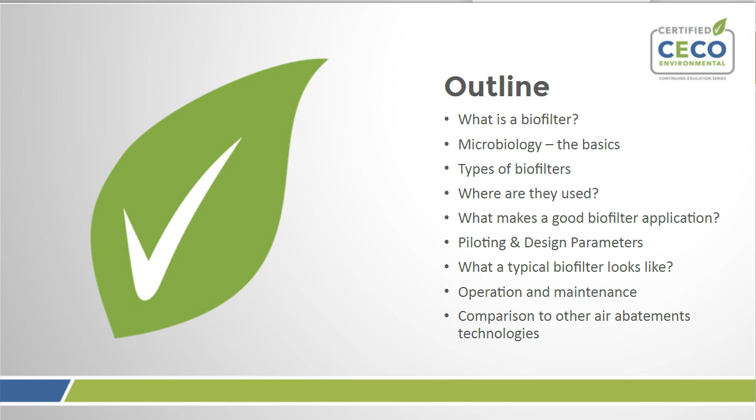We're going to start off with a poll question, and you'll be able to actually answer the question in the next slide. How much experience do you have with biofiltration? And there's a couple options there. I'm an expert, I have some experience, a little bit of experience, no idea what a biofilter is. And this is where you would answer. And we'll give everybody a couple seconds.

Okay, finished up, and let's see what we have here today in our audience. For some reason, we're not getting any answers, which I don't think is right. Let's try that one more time and see if it'll freshen up here.

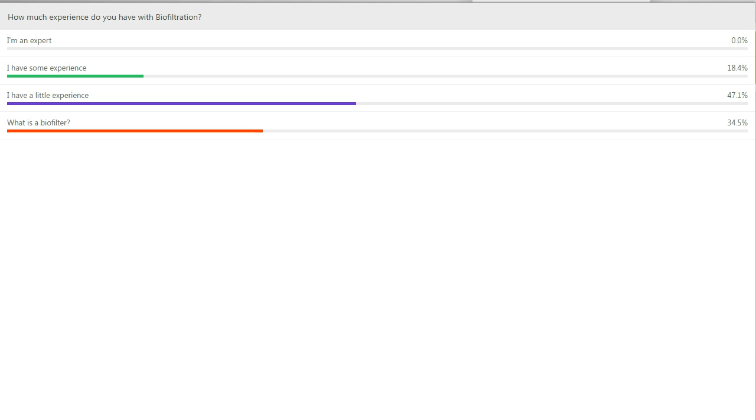There we go. Okay, so we have a good portion here that are learning about biofilters for the first time. Quite a few have a little experience. And then we have some that have some experience, but no experts. So I think that you'll get a lot out of this presentation. It's definitely geared to giving everyone that basic overview. So we're glad you're here. And I'm going to pass this on to Thomas, who is going to start with our first portion of the presentation.

All right. Thanks, Mary. I appreciate that. Oh boy, I don't know if we're both clicking. Okay. Yeah, so that poll results, there we go, we're aligned. Sorry about that, everybody.

Yeah, the poll results are great. I'm glad there's no experts here. Seems like we have the right group of people that hopefully we can get you guys a little bit of framework about what a biofiltration system looks like and how to use them and where you should consider them. And so with that, let's jump right in.

So first question, what is biofiltration, right? In the context of this conversation, we're really talking about gas streams, air streams from a process that have some sort of compounds, VOC or something similar, where we want to treat that VOC or the pollutant. And we're going to treat that with microorganisms in the system to degrade and biooxidize the compounds to make them suitable for emission to the atmosphere.

You can think of it as a kind of two-step process. The first step is transferring the compounds you want to treat into the biofilm where the biology is living. The second step is the actual biooxidation that occurs within the biofilm. We're going to go into a lot more detail about what that is and what parts you should care about as an engineer or someone involved in one of these systems.

So why would we want to use biofiltration? Well, it's a green technology. I'm sure you saw that in Mary's blurb she sent out to everybody. We're really excited about it because it really is a green technology. And green sometimes also means reduced cost in this case. So how are we green? How do we reduce cost?

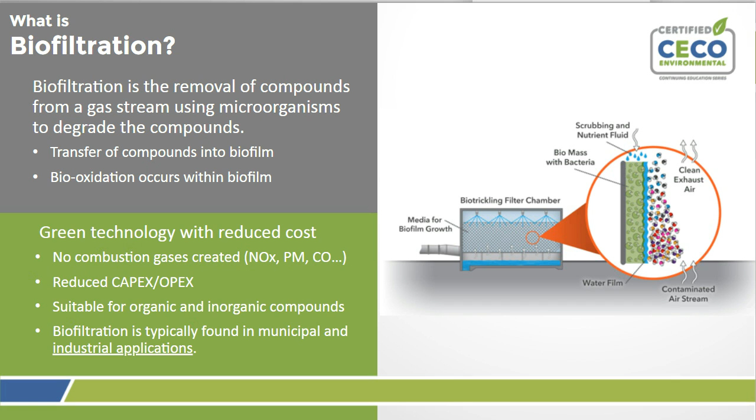So biooxidation, that's the heart of what biofiltration is, right? It's a biological process. We're typically treating VOCs, and some other compounds can also be considered, but really you're introducing them to a biomatrix, then you capture them there and you digest them. From this digestion, you're turning the exhaust into carbon dioxide and water vapor to the atmosphere. Obviously that's a fine thing to send compared to a VOC. So that's the heart of the process.

You can see this picture on the top right. That's kind of the chemistry and biology background: you've got the air on the left and the biofilm on the right, and there's a mass transfer process across that. And you're slowly converting things from what you don't want to what you want.

Bottom, you can see kind of a nice little animation of what a system looks like, and inside of it you got the microbes, right? Those of you from biology class remember you've got these different microorganisms that consume and eat and do things like that.

Everyone, I think, probably realizes that living things need things to live. So you need food, you need energy sources, and you need nutrients, right? So it's like your yard. You go out and put fertilizer in your yard, nitrogen, phosphorus, other minerals. You want to make sure you have all the necessary building blocks for the biooxidation to occur.

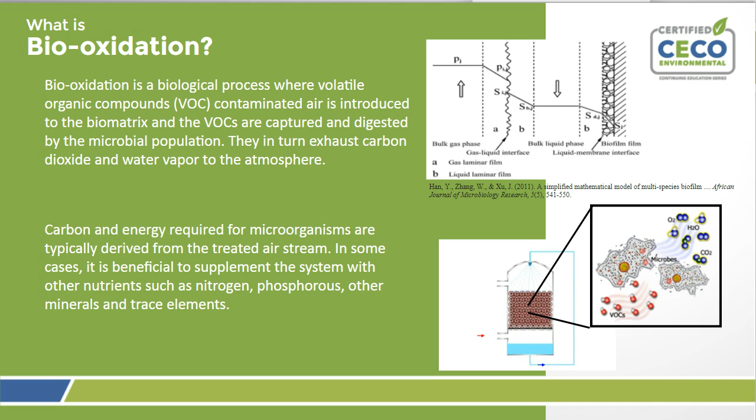This is where it gets interesting. Some processes have a complex stream that really can meet most of those needs, and you don't have to do any or very limited supplement of nutrients. And sometimes you have to add a lot of nutrients. That's where you do testing, and Vern, again, will talk about testing, and you can figure out what you need to do. So that's biooxidation.

I'm going to show you this next slide. So let me just quickly say I'm a mechanical engineer. I am not a biology person, but here's the summary of what's out there, right? So we talked about biology, but what is it? It's bacteria. There's different types of bacteria, and there's fungi. And I think the takeaway here is to really understand that there's not one size fits all, right?

So if you're trying to get something that's a hydrophilic compound, and it's easy to get into water, and you can get into a slime, a biofilm, then a heterotrophic bacteria might be a great fit. But if it's more of a recalcitrant or a hydrophobic compound, or more complex or challenging to consume, it might not have enough time to get into the water. It might not be practical to make something for scrubbing that's so large. So you might use a fungi-based approach. And the fungi have surfactants and different enzymes that basically reach out and grab the compounds and let them work.

So there's these different heterotrophic, autotrophic bacteria. Some systems we'll talk about are hybrids. They have a little bit of everything. It really depends on what you're trying to treat and how much space you have and what your permit is. And we'll talk about permits and what we're trying to treat. That's the biology. At the heart of this, again, it's microbiology. It's really the bugs.

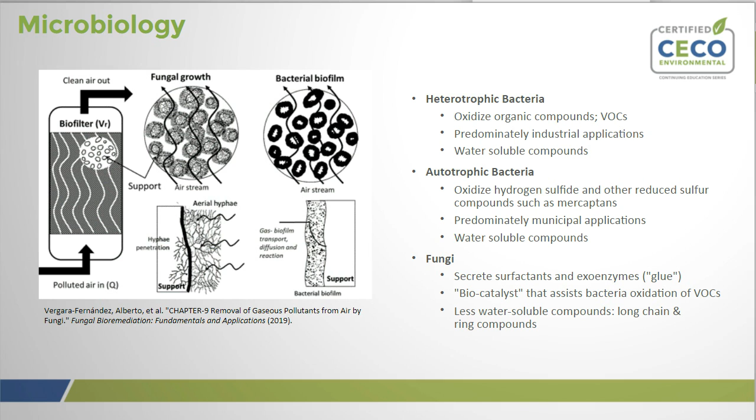If you want to learn more, the EPA has a great PDF out there about biofiltration. It talks about a lot of this information, some more details, and points you in great ways to learn. We use the naming convention they use there. And this goes from left to right in age of development, from oldest to the most recent, and in complexity. So we start on the left, a biofilter, one of the earliest designs, on the order of 100 years old technology. We'll talk more details, but it's the simplest one.

You basically take the air emission, you use a blower to put it below the bed, and it goes out through the bed and gets treated. And you have biology in that bed. You don't have as much control; we'll talk about pros and cons there in a second.

Then we get a little more complexity, a biotrickling filter. For those of you that know wastewater treatment plants, it's a lot like a trickling filter, except there they have it in water. Here we have it in air. Similar concept, a lot of carryover. Those of you that know about chemical packed bed scrubbers, similar to that.

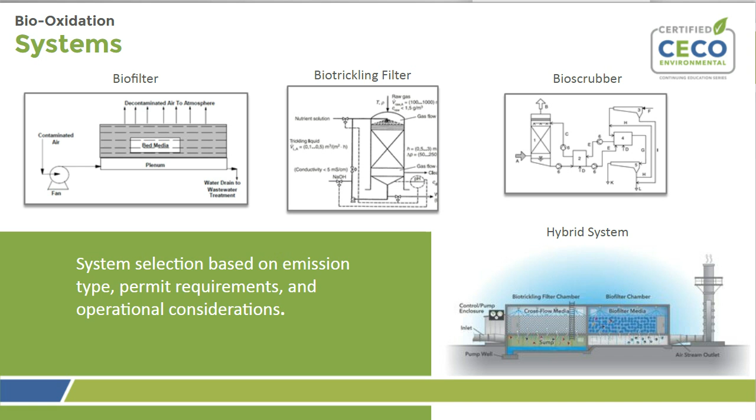As I mentioned earlier, it's simple maintenance. There's just basically a blower. Not a lot to take care of. The one caveat to that is media replacement. It's an organic media. We'll talk a little bit about channeling in a second, but that organic material can get used up. It can clog. You can get too much biomass growth because you don't have a lot of control.

And so you have to replace it typically in, let's say 2 to 5 years is a range to be thinking about. And it's not a simple change, right? You can see how large this is. It takes a couple of weeks to switch that out. So it's good to think about that in your planning. Another thing to consider, it actually can do very well in DRE on certain types of things. Again, you've got to know pros and cons of different things. You can get different types of bacteria and fungi growing in these environments, and so you can do very well because they typically have high retention times.

And that's the next point, right? Retention time. So you'll hear the term EBRT, empty bed residence time. It's basically how long is the air in the media, right? So it's a biological process, right? More time, just like a thermal oxidizer, you need to have enough time for the oxidation to happen, but a thermal oxidizer might happen in a second or less. Here in this system, you're looking 30 to 90 seconds. So they're big systems, right? They're very large systems. And that's something to think about, again, when you're looking at different systems.

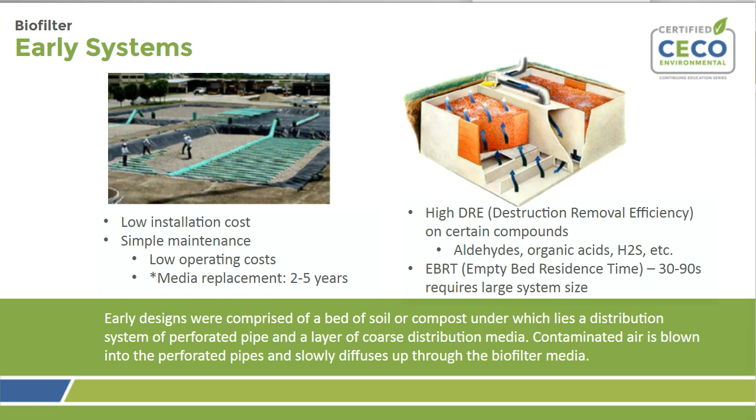Some challenges that we see with biofilters. So as I mentioned, these were the early designs, 100 years old type time frame. You still see them get installed today. They have their place, but they do have challenges. Typically, they're large fields without a roof, so it can be a little tricky to really know removal efficiencies. You could obviously put a roof on it if you chose to.

That would kind of cut into your cost advantages, but that's one of the challenges. Surge loading efficiency: you typically don't have the ability to dump something into a sump. You grow the biology for what you've got coming, and if that changes dramatically, the system can have trouble.

The emissions are going to go out the channel and not through the bed. And when they go through the channel, you're going to have really low DRE performance there. And so that really starts to impact. And that's why the media replacement cycle, 2 to 5 years, is something to be aware of.

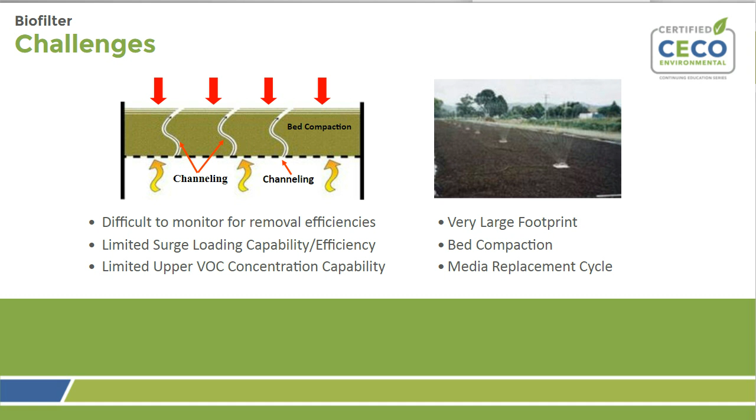So let's go to the next step in technology: biotrickling filters. We just talked about some challenges here, and as folks were designing systems, they looked at, okay, how do we solve these problems and what else is out there? As I mentioned, wastewater treatment plants have trickling filters. They are all about treating material that's in the water, pouring the water over media and letting biofilm grow in that media. This is a very similar concept, except we've got to get the emission into the water as part of the process. So how do we do that?

We basically take a chemical scrubber, which is all about getting air emissions into scrubbing water, and then a trickling filter, which is about treating water that has stuff in it, right? So it works together great. It has inert media. The top right is pictures of 3 types of media. We have fixed film on the left, corrugated looking plastic. That's very commonly used in the trickling filter space.

To the right of that, we have random media or packing balls. Very similar to chemical scrubbers. You're looking for places for biology to attach. You're looking for drip points. It's a very similar concept of scrubbing and letting stuff build up on it. And then the top is a puff of foam media, and that is useful in places where maybe growth isn't as excessive, not worried about plugging it, but you need lots of surface area. So it depends on where you're going.

And that's where you should work with whoever's designing the equipment to understand the emission and the application to pick the right kind of media. They have pros and cons. The corrugated media has very low delta P. It's very good for certain aspects, but you're not going to get as much surface area or efficiency as the foam, for example.

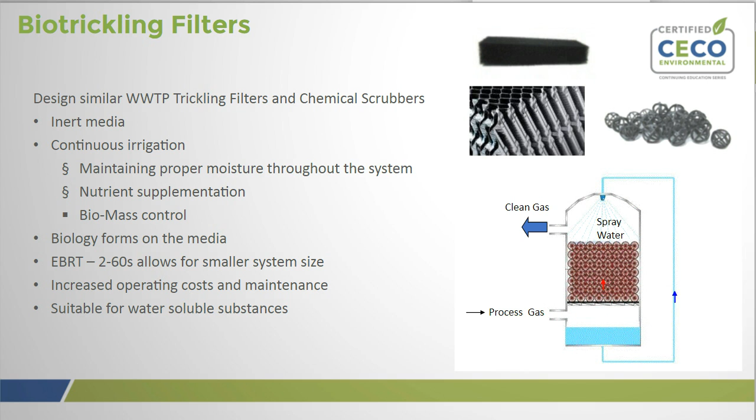Vern will go a little more into the instrumentation, but those sensors need calibration, right? They need maintenance and cleaning. The pumps need a filter basket, for example. So there's just steps of maintenance. Nothing crazy, nothing that a plant, a facility that has a maintenance team can't do. We regularly see these things lasting 15 years without really any major intervention. And the scrubber part of it is really targeting water-soluble substances.

So let's talk about the third kind of subset here, bioscrubbers. Again, we're going down this journey of complexity or development in the technology. So bioscrubbers is the next one. So basically, you're adding a sump to a bio-trickling filter to add more biological activity, right? So you don't add it in the media, you add it in the sump. And the sump can be a tank, it can be other industrial wastewater systems, and it's all about treating.

It gives you more control, more options, change the temperature, do different things, add chemicals, refiners, clarifiers, things like that. There's a lot of options here. And so it's all about the sump, right? Again, it's water-soluble compounds or substances. It's got inert media. You have all the same ability with continuous irrigation, which is nutrient control, scrubbing efficiency, biomass control, things like that.

Again, that no free lunch comment. That complexity comes with performance, but it also comes with cost and maintenance, right? So you've got more equipment to maintain. In general, these are well-vetted technologies from the industrial wastewater space, so it works well. It's not too hard to deal with, but there is more to take care of.

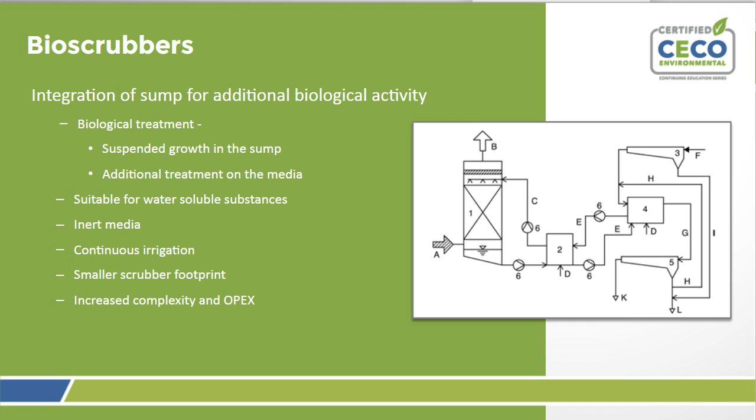So we're always advancing, right? The goal is how do we do better? And we're going to talk about the hybrid. I mentioned the hybrid is kind of a fourth thing. And how did the hybrid come up, right? The hybrid approach is all about removal efficiency, right? So I talked about earlier different types of compounds. How do we separate how we treat them, right?

So we're talking about step one, separation, which is partitioning hydrophilic and hydrophobic compound treatment methods, right? So treat one, then treat the other. So the hydrophilic removal is typically number one, so you have a scrubber or something similar, or a bio-trickling filter chamber, and that gets the hydrophilic. And then you have some emissions that are going to come out to the next phase, and you want to put in something for hydrophobic. And so that's the fungi and maybe longer retention time, things like that. So that would be the next chamber.

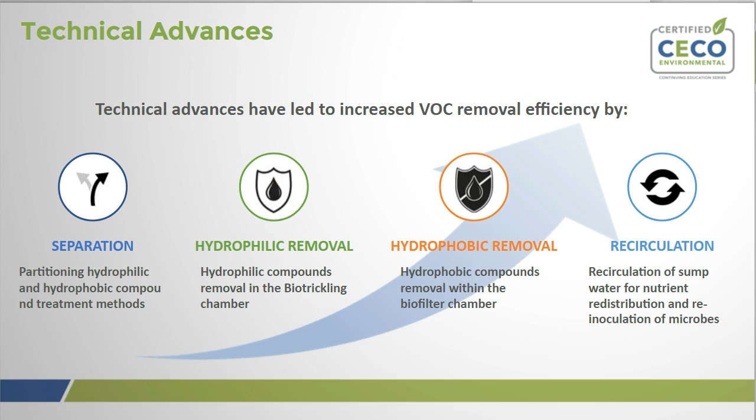And then the other takeaway from this is recirculation. So we have different biology, but we need nutrients everywhere, and there's always value in kind of stirring the pot when it comes to biology. We're trying to re-inoculate often, right? Because microbes don't live forever, right? You're always trying to grow more. So recirculation of the sump water between the two gives you the ability to control what's growing or help growth in the multiple chambers.

Here's a poll question. Mary, I guess, do I read this? So I'll read it. How's that? Go ahead. I can read. I'm good at reading, I think.

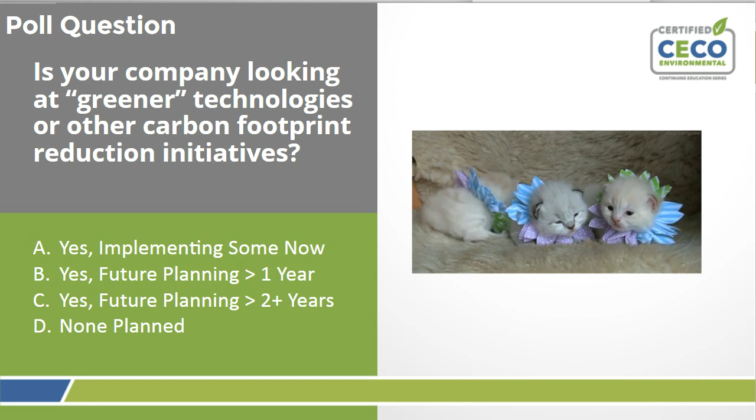We'll give it a little bit more time since the last poll question seemed to take a few seconds to catch up. So, all right, let's see what some of these answers are.

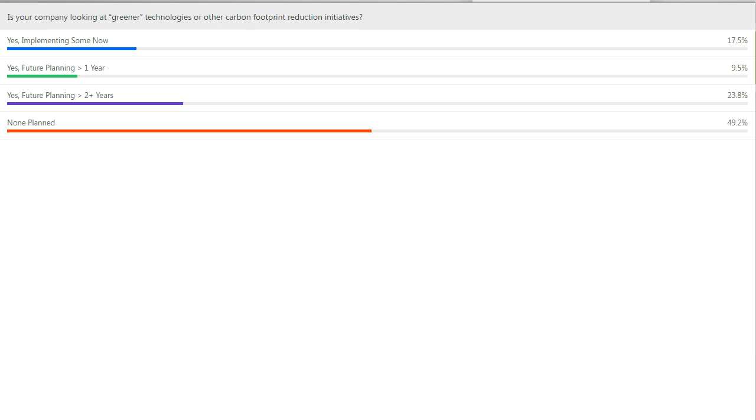We've got a wide mix here, I think. Some at this point don't have anything planned, but definitely a decent amount that are already in the process of doing something. Quite a few, about 10% there that are within the next year, and then within the next couple years. And that's definitely what we're seeing across the board with a lot of companies, that there's definitely a move to looking for greener technologies and trying to figure out how to reduce their carbon footprint, and a timeline that makes a whole lot of sense. So thank you.

Comments? Yeah, that's great. So back to you again. Yeah, this certainly aligns to it. So a couple quick things.

We were talking about the hybrid. Here's an example of a hybrid system. They've existed in industrial space for a couple decades now. They're a great technology. On the left you can see one installed, and the right graphic shows the workflow: there's one chamber on the left and one chamber on the right, and Vern will go a little deeper on that. Again, it's all about VOCs, getting more of the VOCs. Sometimes you're going to have hydrophilic and hydrophobic, so you need an approach that addresses both of them.

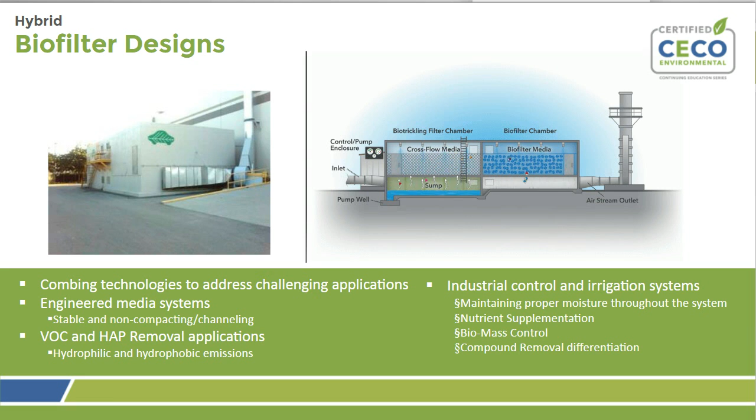I think we have another. Yeah, so here's a little zoomed up picture of it. So it doesn't have to look like only one format, right? There's a horizontal one on the left, which is great if you have a footprint. Then you can have a bigger unit, because it doesn't get too tall. And if you don't have as much space, you can do it on the right, which is stacking

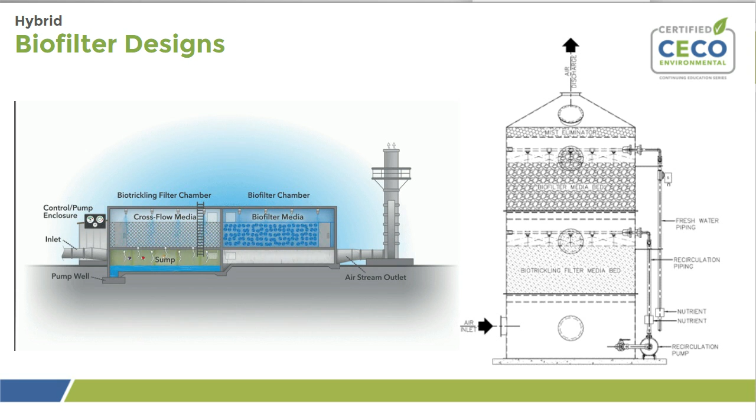the systems, right? Air is flowing from bottom to top, and you can see, if you squint, that says bio-trickling filter on the bottom and biofilter on the top. So that's the hydrophilic on the bottom, and then you're going to get the hydrophobic on the top. There's ways to get organic media in that biofilter to help growth of different types of biology. And so a couple last points before I hand over to Vern to get more into the details.

Where would we see biooxidation applications fitting in industrial applications? We've seen them installed in the last couple of decades in a large area of the industrial space. Engineered wood is honestly the biggest one. Very common there. It's got a really good use case there. But we see it in a lot of places like paint, coatings and resin applications.

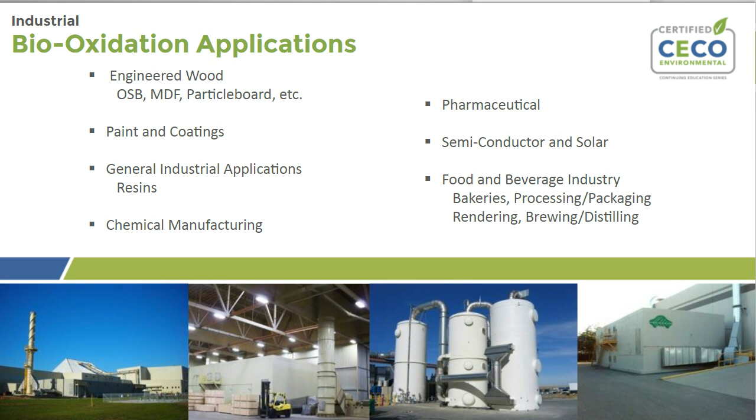Anything that's thinking about an RTO or a thermal oxidizer, there's probably a good fit here, or it's at least worth considering. There are definitely some nuances here that should be considered. Not all compounds are conducive to biology growth, but it's something to consider. So here's a bunch of options. As you can see, they're a broad spectrum of the industrial space. And then let's look at a couple more slides about what an industrial installation looks like.

So here's a paint manufacturer, and they were trying to treat hydrocarbons from the mixing process. Just to give you some scale, this is a 20,000 CFM system. It's a combination of bio-trickling and then biofilter stages. And so it's frankly not the smallest thing ever, right? They're big. But what was interesting here is this is a biofilter, but it's modular, right?

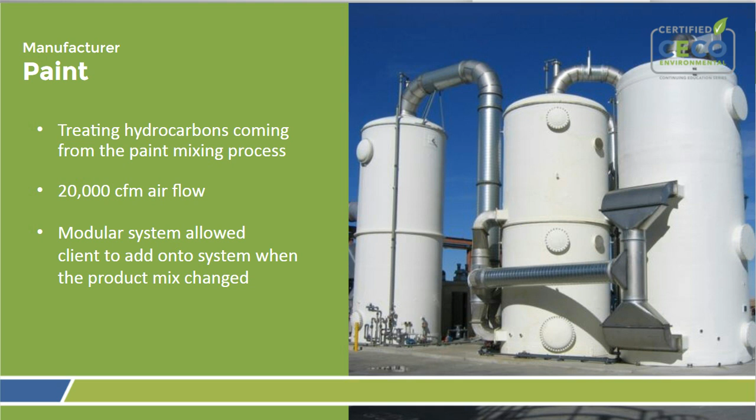There was a conversation that the paint process or the manufacturing process might be changing, and they wanted to treat some different compounds down the road, and that gives you flexibility. It's a nice thing about being modular. You can add chunks as needed if your process changes.

And again, as I mentioned, we're talking industrial today, but just to give a little awareness of the municipal side, I think people are probably somewhat aware of headworks and pump station systems. These are typically smaller. There's a lot of these out there. They often are bio-trickling filters and sometimes biofilters. They're typically a little simpler, lower maintenance. They do really well in that space.

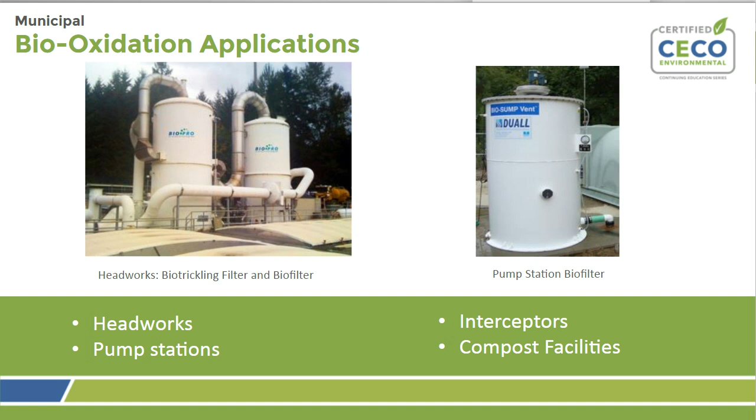And so with that, I'm going to turn it over to Vern to really dig in a little bit about what makes a good biofilter and some of the engineering technical details to be considered with that. So Vern, if you want to take over.

Very good. Thank you, Thomas. Can you hear me?

Hello? Yep, I sure can.

Yep. Okay, very good. So as far as what makes a good application, we can look at both municipal and industrial. And as far as what we like to see, because this is a living system that we're using to treat our contaminants, we like to have continuous operation. So whatever the emission stream is that we're going to be treating, it's best if it's continuous. And that kind of gets away from having a feast and famine type scenario.

So because it is a living system, we want to avoid where we're not going to have food or the contaminants going to it. And ideally, as far as the amount of contaminants and the concentration, the loading of these contaminants, high to low, we don't like it if it varies more than like a 3-to-1 ratio. So ideally, it's consistent, and then we don't have high peaks in the contaminants that we're going to be biooxidizing.

The next, just because I'm going to say it's easier, is if the contaminants of concern are hydrophilic, meaning more water soluble, then we know that's going to be easier for the biology to do their job. And we'd be looking at the bio-trickling filter in that case.

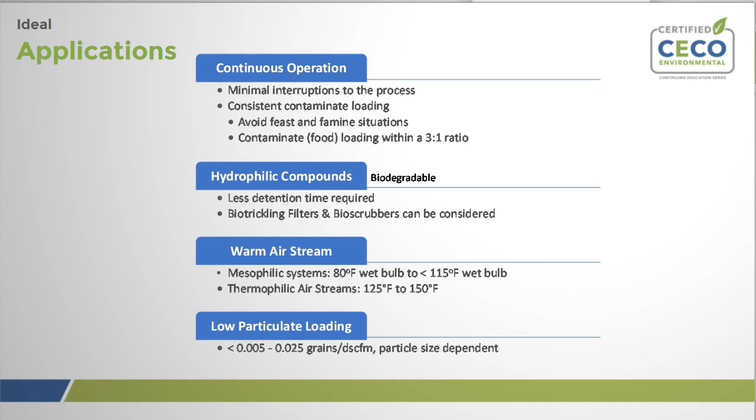And finally, another thing that makes for an ideal application is if there's no or very little particulates or solids. And if there are particulates or solids, then that's something that has to be dealt with. So if we run into a situation where, for example, there's low temperature, then we can still perhaps consider using a biooxidation system, but we're going to have to take steps to bring that temperature up, such as literally heating the airstream, or perhaps we can add temperature to the sump.

And if the temperature is too hot, if there's an emission stream that we want to consider biofiltration for, then we're going to have to perhaps use dilution air. Particulate: if you have a stream that has too much particulates, then you're going to have to remove that with pre-treatment in front of your biooxidation system, such as a Venturi scrubber or perhaps a dust collector, just to get the particulates out so that we're not having an issue with plugging the media with the extra solids.

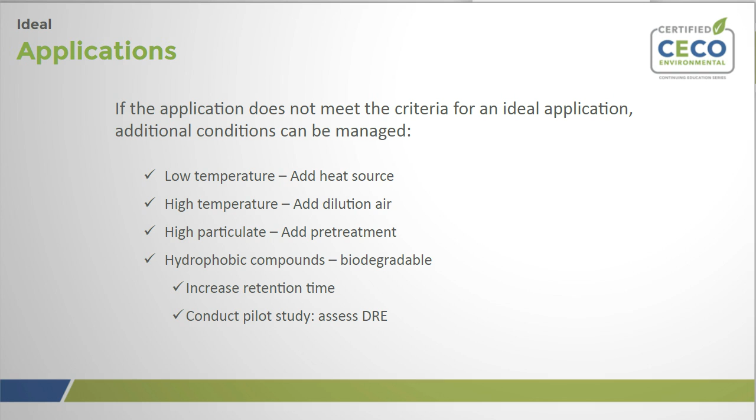And then finally, as far as hydrophobic compounds, those less water soluble, those are not as easy, but we can still treat those, and Thomas has already talked about that. Simply what we are going to look for is more detention time. And quite often what we need to do, and this is more for industrial applications, would be some piloting in order to really hone in on what kind of times we need to meet our objectives.

And we have done a lot of talking on these hydrophilic and hydrophobic compounds. And I like this slide. This is representative of a 15-second bio-trickling filter. And what we can see here is the hydrophilic compounds at the top of the table are just more readily dissolved in water, and we achieve higher destruction during that time period.

Other less water-soluble compounds at the bottom of the table, we don't do as well with those. And again, that has to do with the fact that we're not able to get those hydrophobic compounds into the water as easily, where the biodegradation can take place.

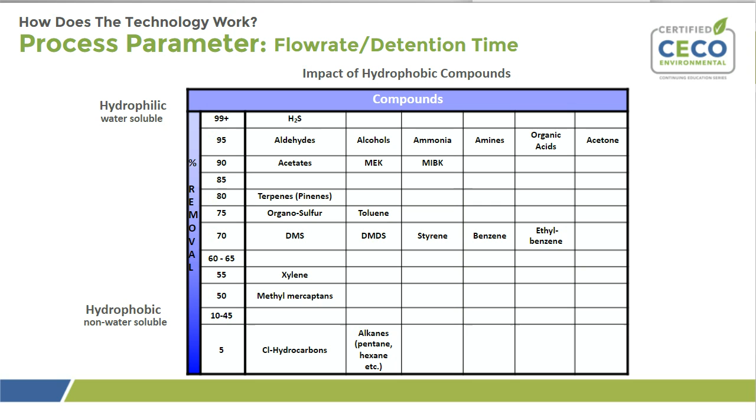And quite often, if we start looking at compounds that we know are less water soluble, then we want to consider piloting. And more likely than not, it's going to be an industrial application, because the municipal emissions that we use for biofiltration are pretty standard, regardless of what municipal wastewater treatment plant you're at. But as far as industrial, quite often we'll end up having a matrix, a soup mix, if you will, of compounds that we need to consider.

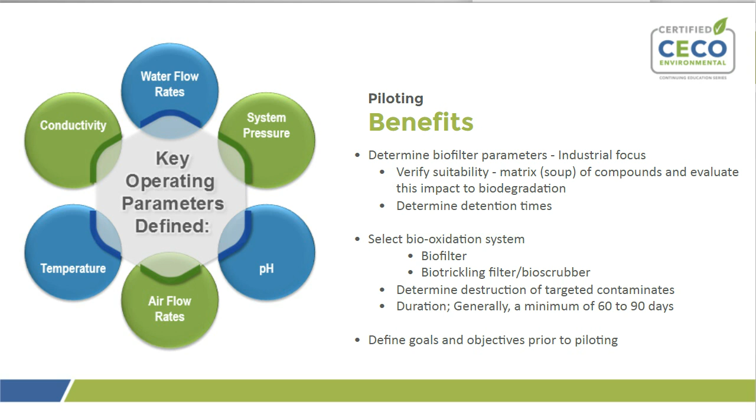And sometimes you're not always going to be 100% sure of the effect on the biology until you do that piloting. So that, in addition to trying to quantify the detention time that you need. And you can see here, when you pilot an emission stream, you're able to get some valuable information as far as what are the optimum parameters that I need, what is that detention time that we can use in order to meet our objectives.

As far as the data that we want to get with the pilot, it's going to be very important, of course, to define your objectives, and that's going to come into just knowing what do I need to meet with this biofiltration unit. And once you have your objectives and goals defined, then based on some of the information that you know of the emission stream, you can select the type of biofiltration unit that you want. What a pilot does allow you to do is investigate and vary perhaps the detention times, and see what works in order to achieve those removal efficiencies that you need to get. And it's important then to collect the data, just so that you can define success with what you've done.

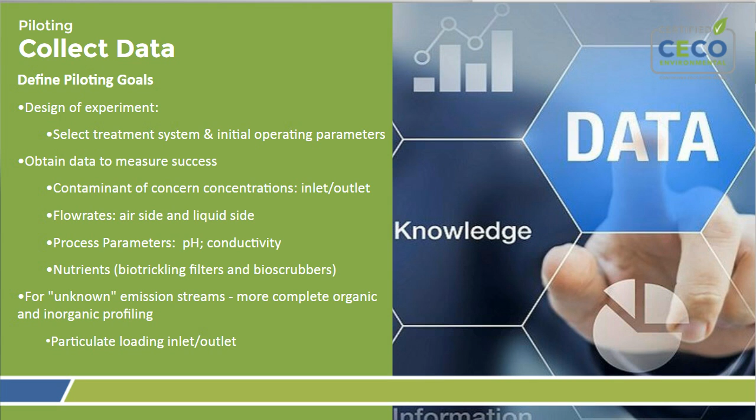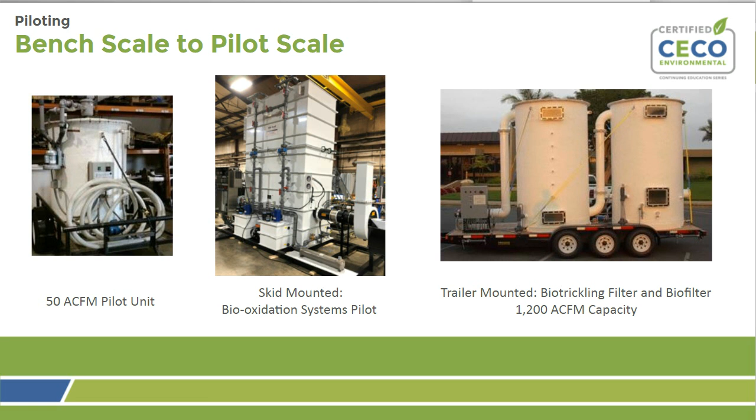And this photo basically shows pilot scale pilots, and the benefit of a pilot scale pilot is the fact that you are doing the pilot testing on the actual emissions to be treated. The alternative would be to do a bench scale pilot, which literally can be on a lab top bench. But again, pilot scale testing does give you the opportunity to do real world emissions and investigate the treatment scheme that you're looking at.

As far as design parameters, there's a range of parameters that one would initially consider. For a biooxidation system, the range of compound loading is going to be 10 parts per million to about 500 parts per million. And again, this is a guideline. Next, for biotrickling filters and bioscrubbers, the detention time is perhaps 15 seconds or less. For standard biofilters, as Thomas was saying, the EBRT could be 15 to 60 seconds, and for some industrial applications, it may be longer, perhaps even over a minute.

The gas velocity that is readily used for these various biooxidation systems is quite often 50 feet per minute or less. Another design parameter that we have to consider, regardless of the particular biooxidation system, is the irrigation rate. And that's going to vary from 0.1 to 1 gallon per minute per foot squared. And that foot squared is the surface area of the media.

And then in addition, there's also pH. The pH is actually more of a process parameter in comparison to a design parameter, in that the pH more results from the biology that you use. And that's similar then to temperature. Based on our emissions temperature, we know perhaps the design biology that we want to use, but it is actually the biology itself that will say, well, this is the temperature that I'm going to be at.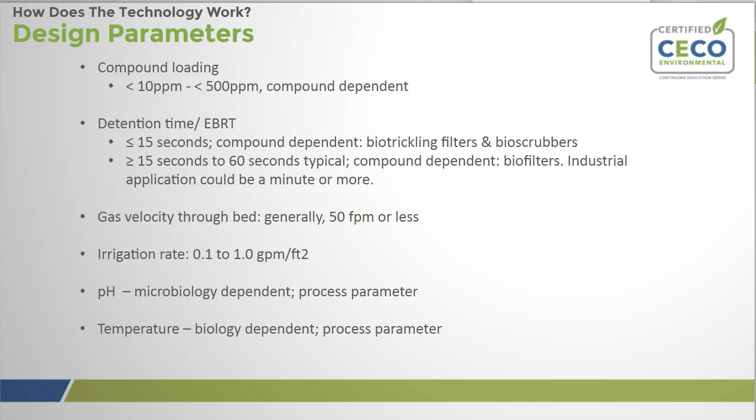And as far as those temperatures, there's two real classes of biology that we'll look at for these systems. One is the higher temperature range, which is the thermophilic bacteria. They thrive in an environment from 125 degrees to 155 degrees. And the other class of microorganisms that we will consider are the mesophilic organisms, and those do well in temperatures between 60 degrees to 115 degrees.

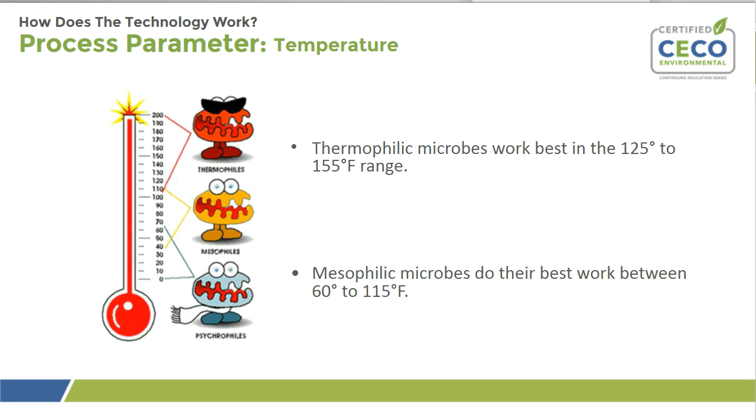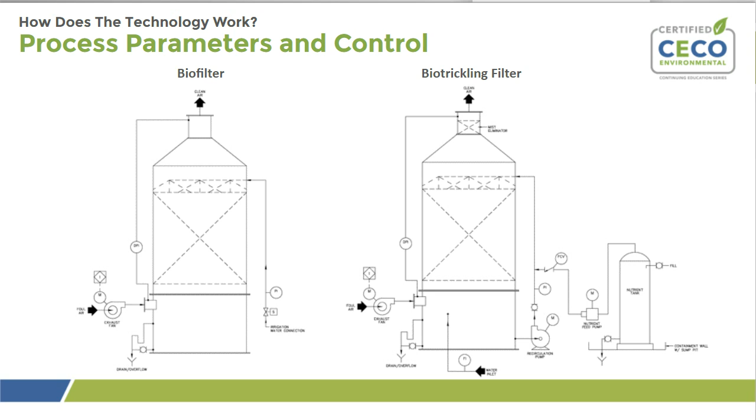As far as the parameters that are required in order to control the system, for a biofilter, you can see on the image on the left, the biofilter really has only one rotating piece of equipment, and that is the fan. And the other thing that we're going to get into a little bit more is the biotrickling filter. So as far as the process parameters for the biofilter, what we're going to be measuring and need to quantify is the gas emission flow rate.

And this is going to be measured by using an inline velocity probe, and that would then be configured for your particular duct dimensions. You can also use pressure as an indicator of your flow rate.

Another process parameter for biofilters is the irrigation flow rate, and that's going to be closer to 0.1 gallons per minute per foot squared. Biofilters are going to require lower irrigation flow rates, and the irrigation most likely is going to be on for a set period of time followed by an off interval.

The objective for a biofilter on the water side is to keep the filter bed moist and optimize the performance of the fungi and bacteria. So continuous irrigation of a biofilter may be detrimental if it flushes the fungus away.

And temperature should be monitored with your biofilter just to assure that the media bed remains in the temperature range selected: either the mesophilic range, 55 degrees to 115, or the thermophilic range, 125 degrees to 150.

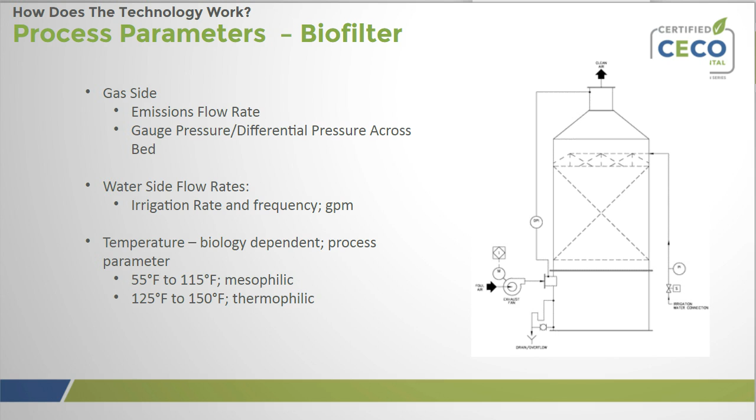And now, for a biotrickling filter, these are the additional process parameters we're going to monitor, because all the process parameters of a biofilter, like the gas flow rate, we would monitor as well. But now we're also going to be looking at the recirculation rate. The recirculation rate is going to be closer to 1 gallon per minute per foot squared for the biotrickling filter or for a bioscrubber.

And the biotrickling filters are continuously irrigated. This goes back to the fact that what we're relying on here is that these compounds are more easily water soluble.

Blowdown is also going to be monitored with a biotrickling filter, just to assure ourselves that the system is going to remain healthy. We need to make sure that the byproducts from the biooxidation do not build to an inhibitory or toxic level. Therefore, we're going to send part of the sump to drain and add fresh water. pH and conductivity are two parameters that are used to signal that a blowdown should occur.

pH is monitored just to make sure that the environment stays where it needs to stay. Generally speaking, most industrial applications involve the mitigation of organic pollutants, and these organic pollutants will be treated with the heterotrophic bacteria that Thomas talked about earlier. These bacteria operate in the 6 to 8 pH range.

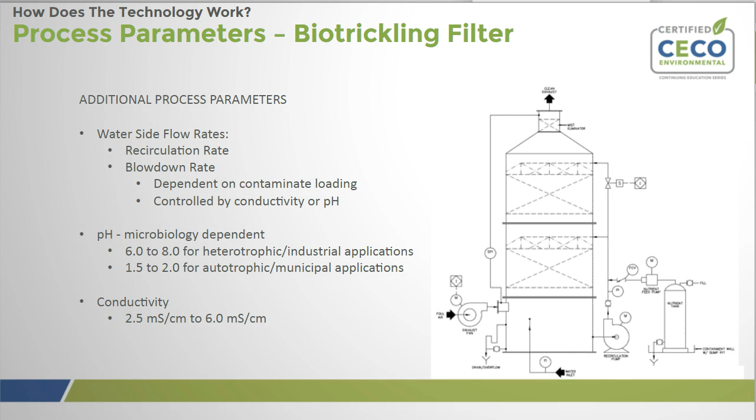Nutrients are the final process parameter. These are biological systems, so we need to make sure that the two main nutrients that we want in the system, phosphorus and nitrogen, are present, as they are required for the biology to do what it needs to do. Normally once-a-week sampling is sufficient: take a grab sample from your sump or from the recirculation line and have that measured.

You can either use field test kits, such as a Hach kit, to assure yourself that there's sufficient nitrogen and phosphorus in the system, or you can have those samples analyzed at a lab. And you can see the little nutrient tank on the right; that provides our storage, from which we meter the nutrients into the system. It can either go into the recirculation line like it's shown here, or sometimes they're added right into the sump.

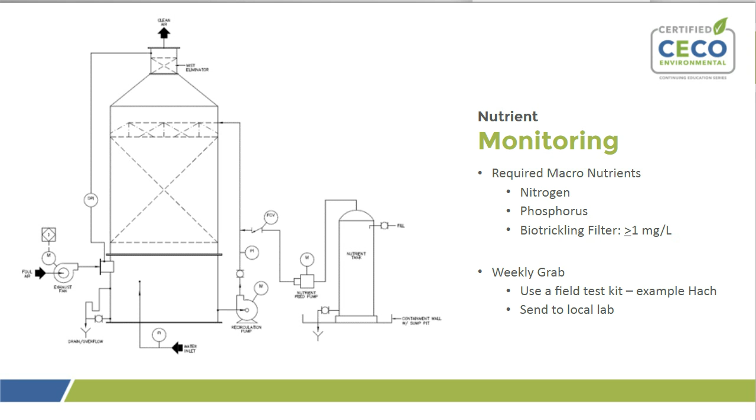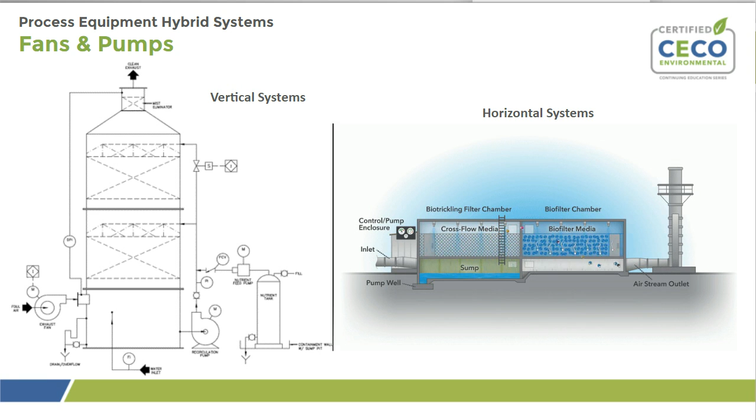And then next, as far as this is talking about hybrid systems and some of the equipment that we end up monitoring and using. Whether it's a vertical system, you can see, if you squint, that the two rotating pieces of equipment are the exhaust fan as well as the recirculation pump, and that would be the same for either one. With a biotrickling filter system, the fan and the pump are going to constitute the majority of the installed horsepower.

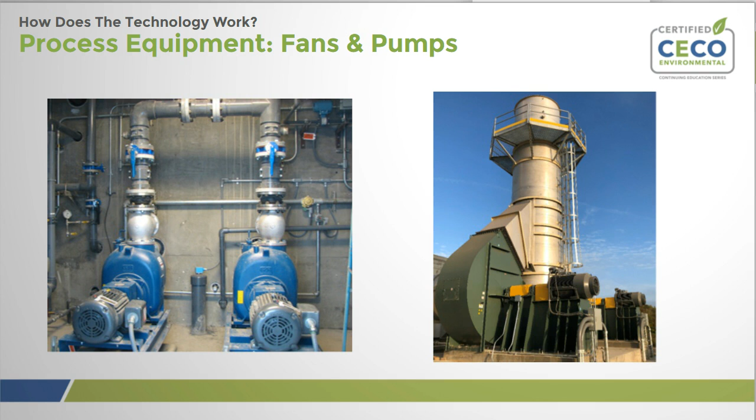If you want to figure out your energy requirement, it's going to be because of the fan and because of the recirculation pumps, and that's what we're seeing here. Again, the two main pieces of equipment for a biotrickling filter, and a biofilter would just have the fan. But here's our hybrid system.

For the hybrid biofilter system, we take advantage of the benefits of the biotrickling filter, which is the first chamber, and couple it with the biofilter, which is the second chamber. You can see the air travels in a countercurrent manner in the first chamber, whereas the airflow was co-current with the irrigation spray in the second chamber.

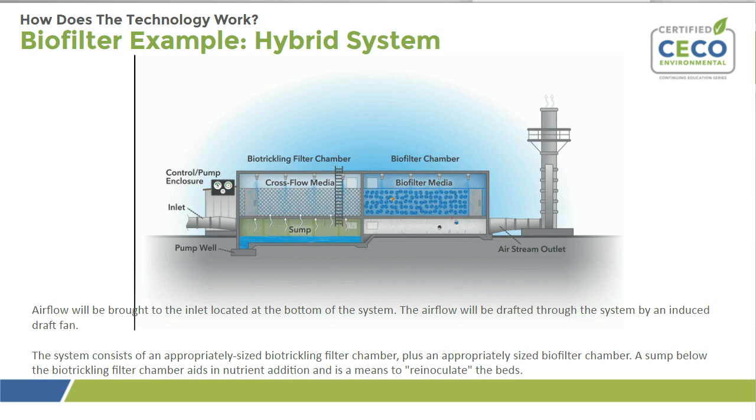In the first chamber, this is where the overwhelming majority of the water-soluble compounds are oxidized. The chamber is filled with fixed structured media for biofilm attachment, and the continuous spray from the sump scrubs the organics into the water for treatment by the bacteria. Nutrients are added to the sump and distributed via the recirculation spray.

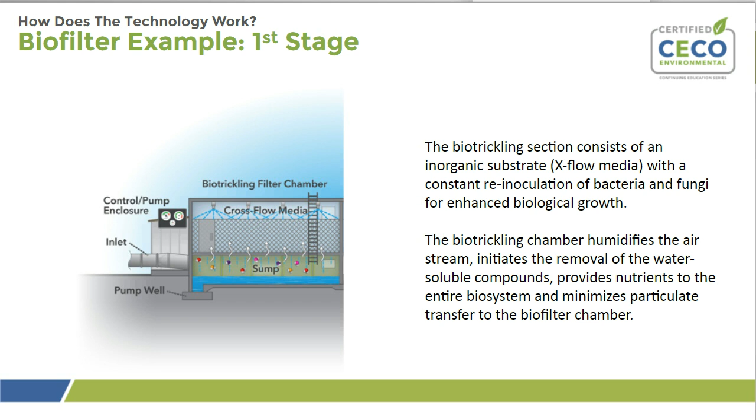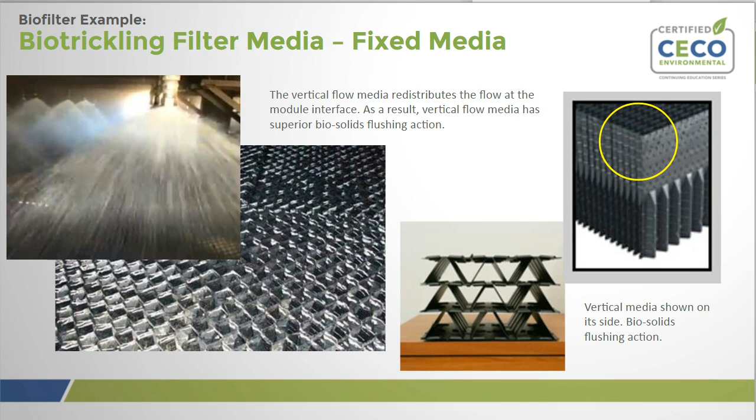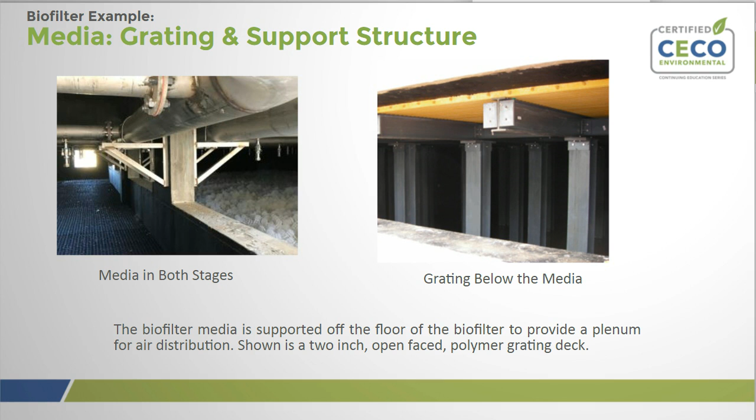The media in the first chamber is fixed media. The vertical flow media has superior biosolids flushing parameters, and this media, I'll show you in the next slide, is located above the grating. As shown in the photo on the right, the media is supported off the floor of the biofilter to provide a plenum for air distribution. The picture on the left shows the fixed media loaded in the first chamber biotrickling filter, and the random packing media, the white media, in the second chamber, which is the biofilter.

The second chamber acts more like an enhanced biofilter and is filled with random or dumped-in packing. Some of the random packing is filled with compost. This chamber is irrigated intermittently in order to optimize the formation of fungi that, together with the bacteria, remove the more recalcitrant and harder to degrade VOCs and THCs. The intermittent irrigation is the source of nutrients for this biofilm as well.

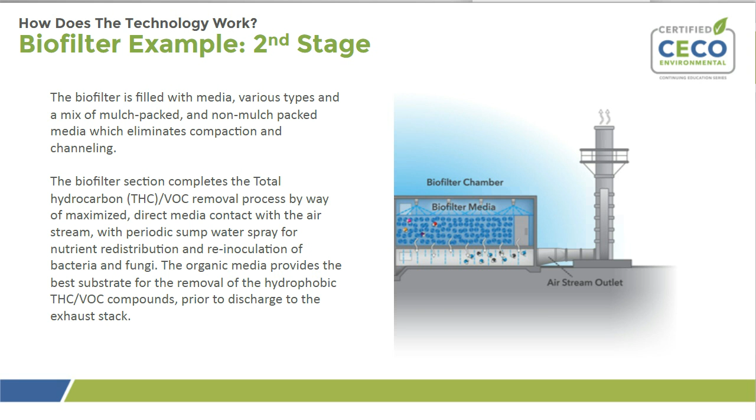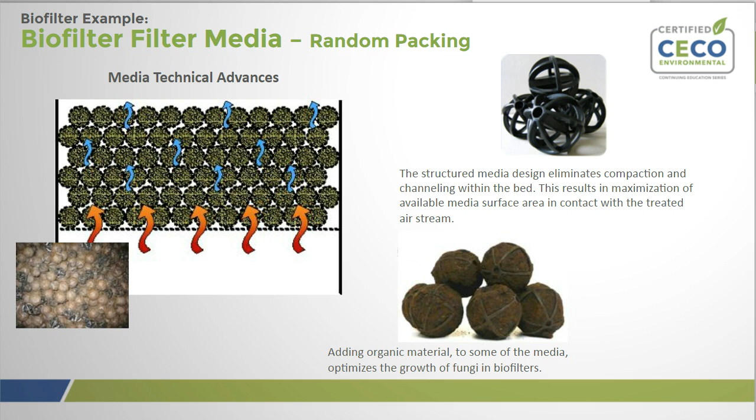These photos show the random packing that is in the second chamber biofilter. The structure of the packing helps eliminate compaction. Some of this media is filled with compost, and that provides a good home, if you will, and optimizes fungi formation.

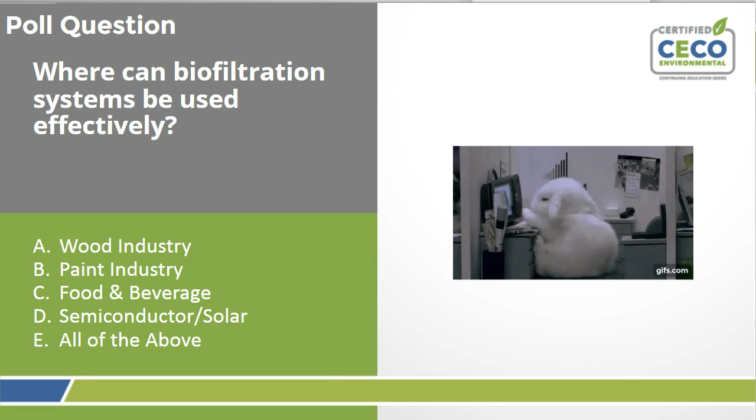So where can biofiltration systems be used effectively? I'll give you all a couple minutes here. We've got the wood industry, the paint industry, food and beverage, semiconductor and solar, or all of the above. We'll just let everyone do this real fast and see if you picked up on that from one of the earlier slides. All right, let's see.

Good job, everyone. Yeah, it's all of the above, really. There's a couple industries that have certainly seen it more than others, as Thomas had said, wood industry and paint industry, but you really can use it in all of these. It just really depends on the application and parameters that you have in terms of size and structure. So good job, and we're going to give it to Vern here to take us to the end.

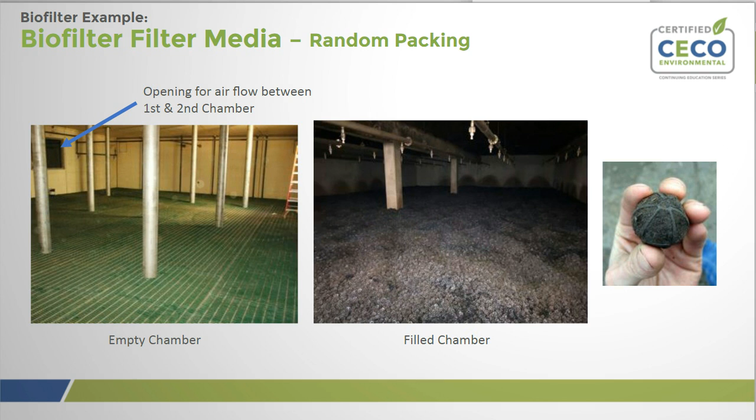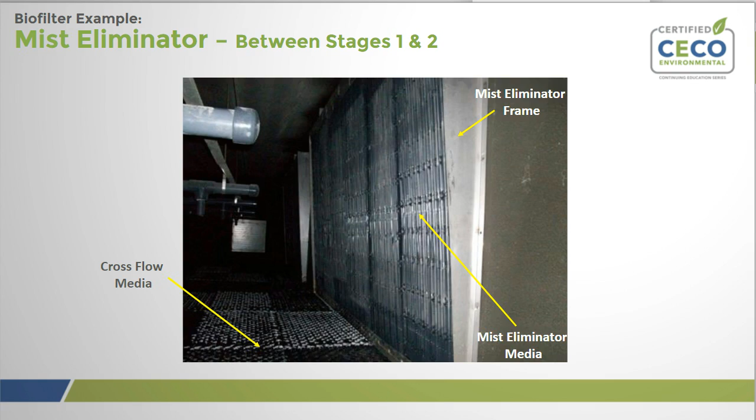Very good. Thank you. What we're showing here is the second chamber, the biofilter chamber, empty, and another photo showing it filled. We use mist eliminators between the two chambers, and this prevents any overwatering from the first chamber biotrickling filter to the biofilter. So conventional equipment is used there. A simple chevron blade style mist eliminator is used between those two chambers so that we don't disturb our biology in that second chamber.

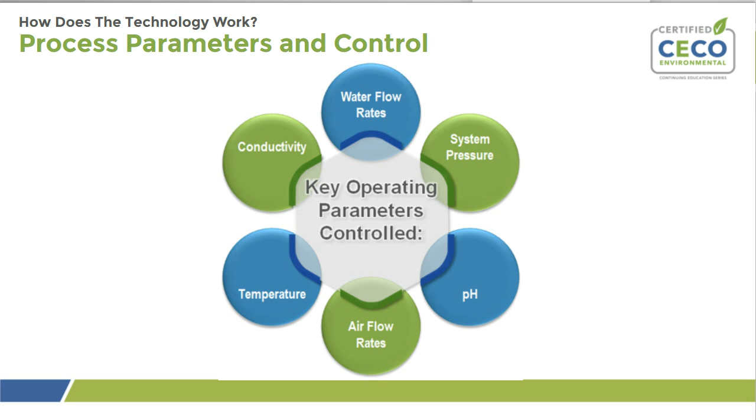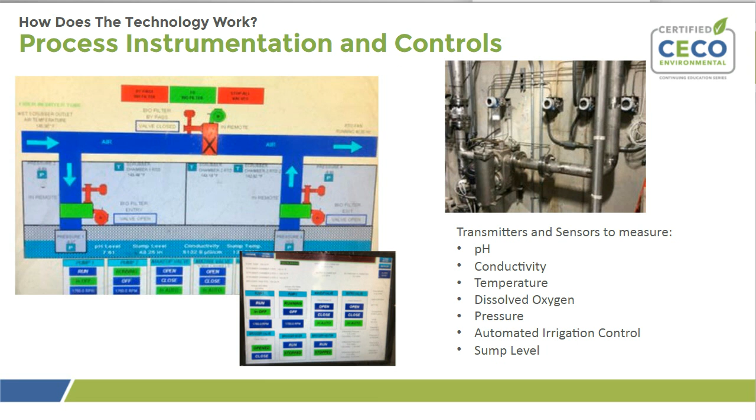The process parameters that we've identified with our piloting and that we want to control are pH, conductivity, temperature, and quite often that's done with just a PLC. The instrumentation used for biofilters and biotrickling filters is standard instrumentation, temperature sensors, pH transmitters, so all very, very standard.

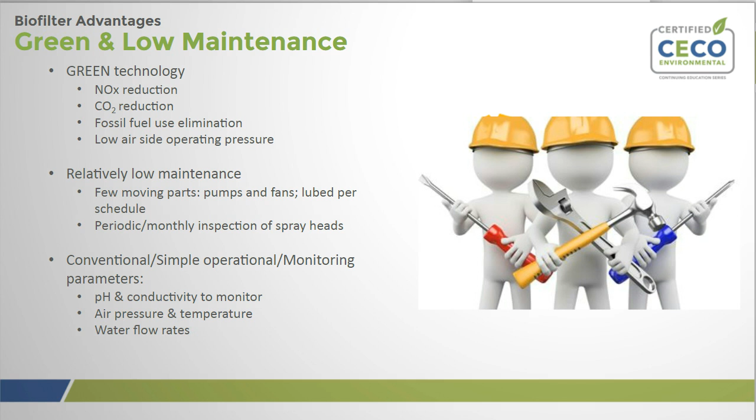What's nice about biofilters, Thomas already mentioned it, is it's green technology. There's no NOx production. There's a reduction in CO2, so that's very important to remember and to consider. A true advantage, truly a green technology that way. And then looking at this slide is a comparison of the various technologies.